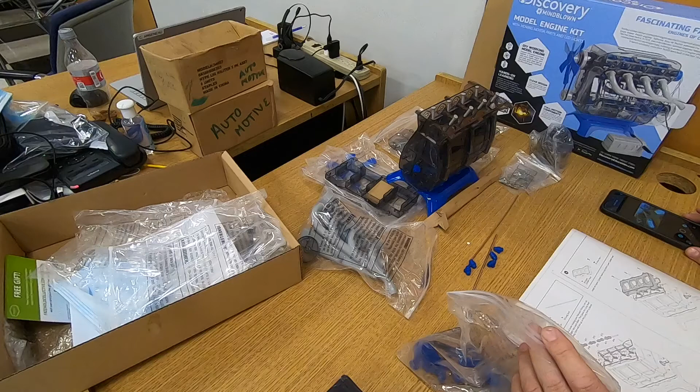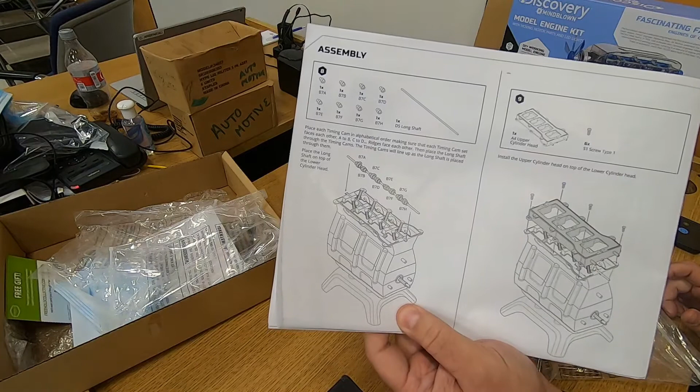All right, everybody, we finished step 7, which was kind of complicated. Now we're going to try step 8, which looks kind of complicated as well. So step 8 is going to have us basically assembling the camshaft.

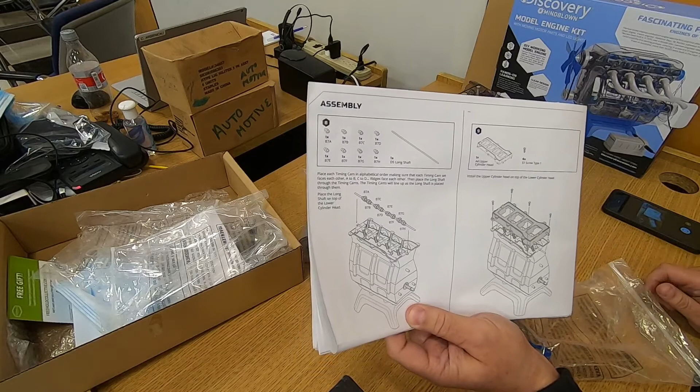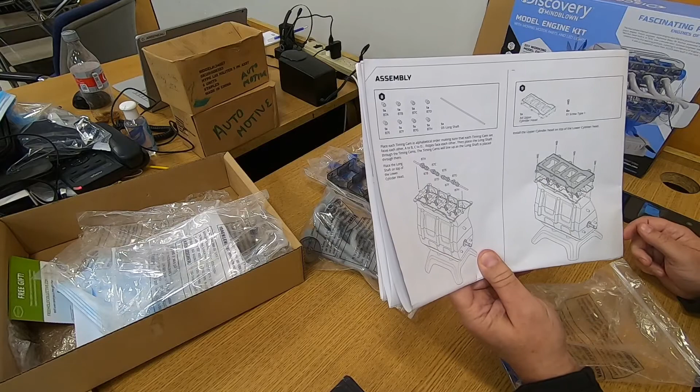Now what it's saying is we have to have all these little pieces out, line them up in a certain order. See, they're labeled A, B, C, D, E, F, G, H, and then put them on a metal shaft. So let me get those parts out now. First of all, you're going to find those parts in this bag with the LED lights. And I've taken them out, I think all of them right now. If not, I have more to take off.

Yeah, there's 2 more I need. And here's one of them. And hopefully I can find the other. That is all of them. So I'm going to close this bag up.

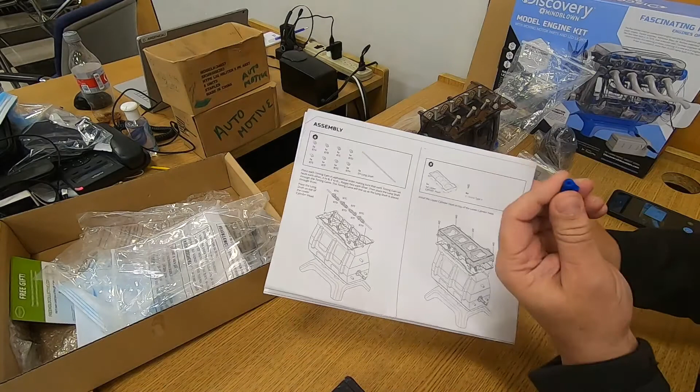Now what it's telling you to do is it's saying there's ridges on these, which I believe are these little tiny marks you can see. Not the cam lobe, but the little ridge. It's saying to line those up and put them in alphabetical order.

So I need to find A first. And this one looks like it's A. So now I need to find the B. That's not B. And here is B. Now it looks like the ridges are supposed to be lined up, so hopefully you guys can see that the ridges are lined up. So I'm going to put those 2 together, A and B.

Now I need to find C and D. There's D. And there's C, and again, the ridges facing each other. So you definitely don't want to be disturbed when doing this, right?

So then there's E and F next. There's F. And there's E, so I have E and F with the ridges facing each other.

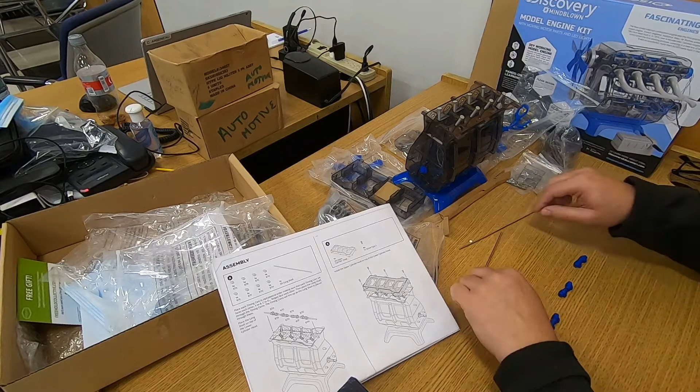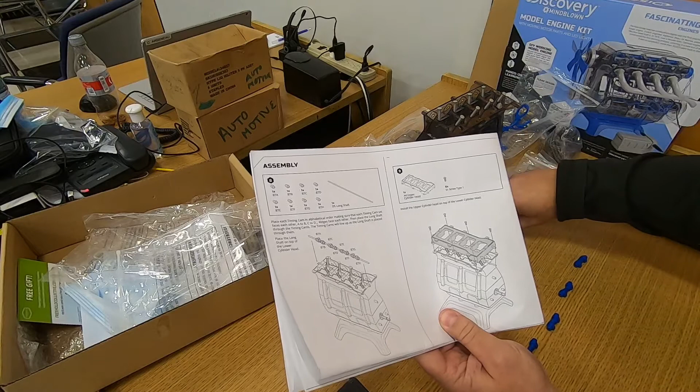So they're in order. It also says on the instructions to use the long shaft. So there's 2 shafts in this little piece of cardboard. And this one is the longer one. And if you look at this shaft, it has a flat side to it. So I guess that's the whole idea, because these little lobes have holes in them, but they also have flat spots. I don't know if you can see that there.

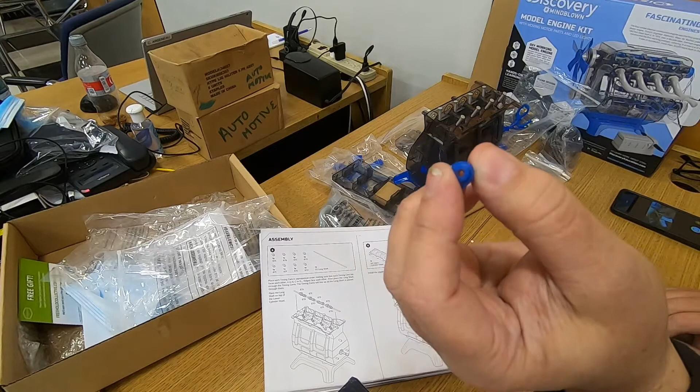So now I want to start putting these together. So I am going to put, I think what I'm going to do is put these 2 first on this side. And basically you got to just keep spinning till it fits easily. All right. So there's C and D, and this should be B. And then this should be A. So far so good. And now I can put these on this side.

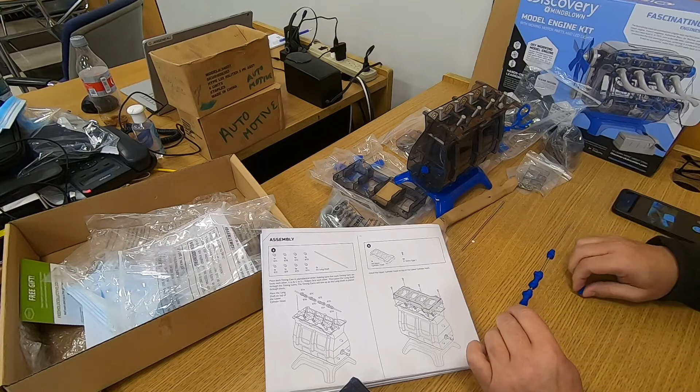This should be E and F, and then I should have G right here, which I do, and H. I want to show this to, oops, see, it's not quite fitting in, so unless it fits in nice and easy, then that can't be the way. Okay, this must be the way.

And I want to show you again on this picture. Notice that those little ridges are facing each other. They may not be perfectly lined up, but they're facing each other.

So now we have to drop this into our engine. So I'm going to bring the engine over here. Remember, this is the front of our engine. We have the wider part of the cylinder head and only 3 pins in the front. The extra pins are in the back, and this is where the snout is, so that all looks properly.

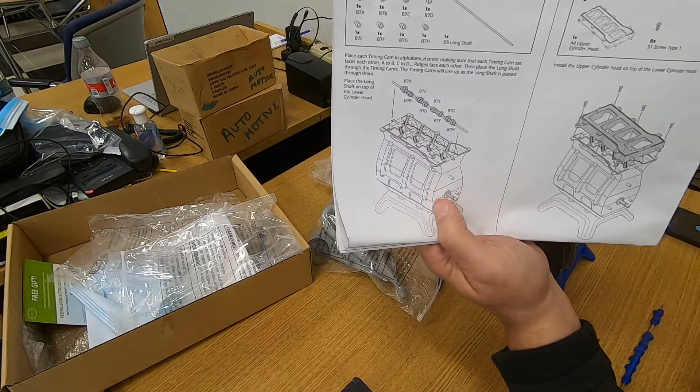Now, this is what's interesting. What's kind of confusing is, according to these directions, the higher letter ones are going to go towards the front of the engine. So basically, I'm going to put it in just like this, because G and H are down here where I'm holding it.

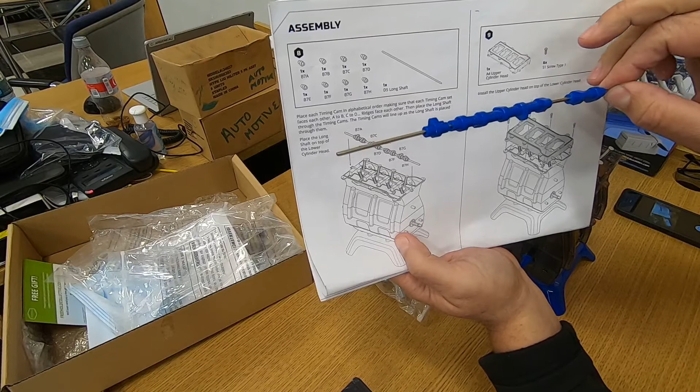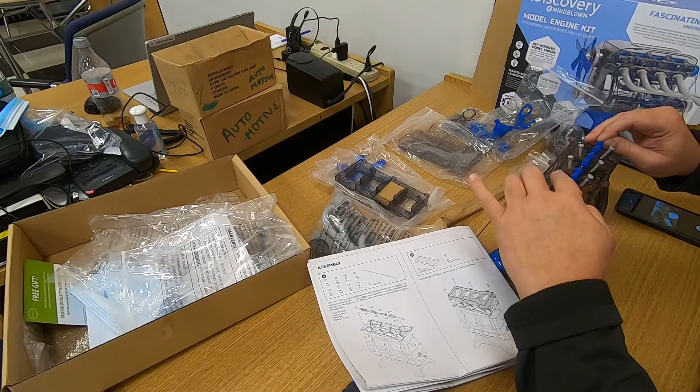So according to this, that's how you drop it in there. You can see the spaces for them. Once you start doing it, you can see there's certain ridges they're going to fit in, and certain ridges they won't.

Oh, this shaft is bent too. That's no good. Try to bend it back a little bit. Might want to check that ahead of time, right?

I did not bend it. It came that way.

So that's basically how it fits. So at this end, which we would call... nope, I did it wrong. Aha, you caught me, didn't you? Right, so I'm going to actually make it look like the directions.

So now we're facing the back because it's showing the front facing this way. So I have this the exact same way. So G and H, which are here, are going to go towards the front.

So it should be A, B, C, D, E, F, G, H, and this is the front right here. Okay, so the G and H is at the front. I don't know why it's like that, but that's why it's like that.

It's also still bent a little bit, and I don't love that. I think I'm going to try to rebend this just a little bit. Might want to check that before you put the lobes on there, right?

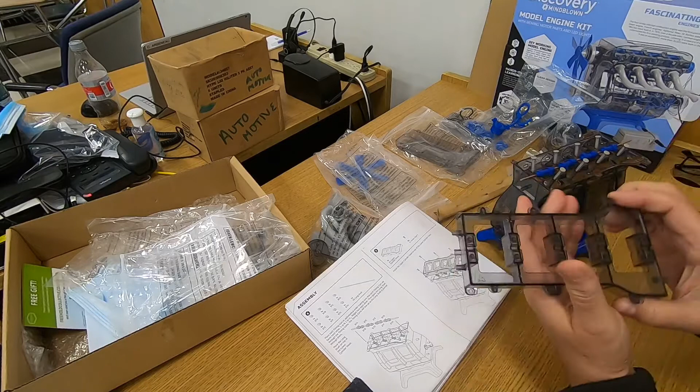And it's interesting, it says there's only 5 screws. Why only 5? Oh, 6 screws, excuse me, 6 screws. So it looks like you fit it in like this. So there's going to be room for this next shaft up here eventually.

All right, so I'm going to put this on top. Now I've held my camshaft in. Well, it's going to be held in once I tighten it down.

6 screws, and I need my screwdriver. There's 3. There's 6. And again, I like to close up this bag if at all possible, just to keep everything nice and organized. And now I am going to tighten these screws, put them in place and tighten them.

So it looks like these screws go on the outside, which isn't too bad. And since this is a magnetic screwdriver, I should be able to drop them in there and start them off, but I'm not going to tighten them till I get all the screws in.

I think I've said this before, even in the real world of automotive, when you put something on, you get all the screws in, then you tighten it. Don't tighten one screw in when the others haven't even gone in yet. Get them all in, get them going a few turns, and then you can start tightening stuff. Otherwise, it probably won't line up, or you could strip something or whatever.

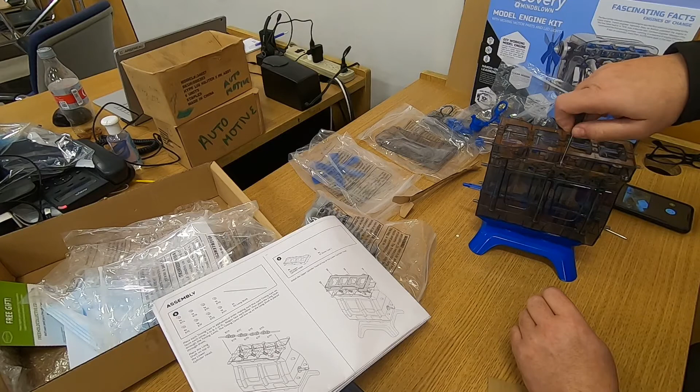So let's see here, every now and then I have one of these that's kind of hard to fit. So I'm going to do like I do in the real world. I'm going to start by tightening the middle first. So I'm going to tighten the other side. And it feels like it's tight, but I want to tighten down some more, so you got to just be careful with that.